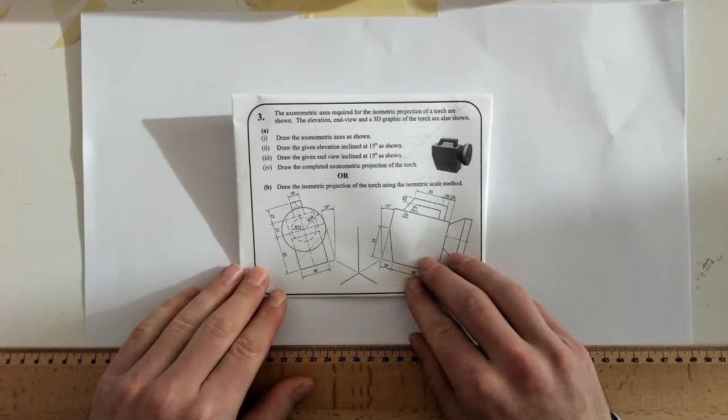Okay, boys and girls, so today we're going to go and do 2016 question 3. It's axonometric and we're going to try the part A here. So let's give the question a read. The axonometric axes required for the isometric projection of a torch are shown. The elevation, end view, and a 3D graphic of the torch are also shown.

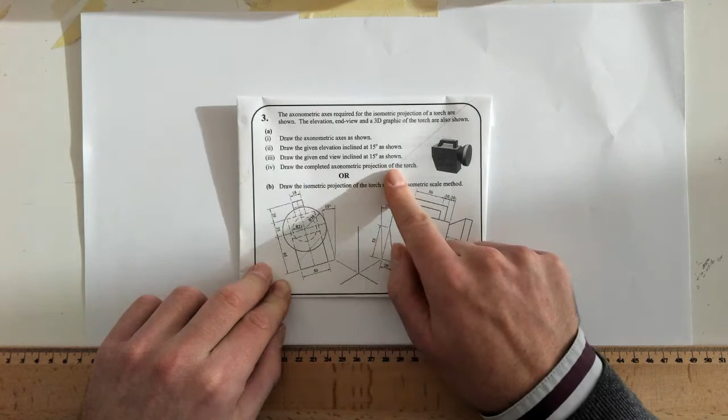Draw the axonometric axes as shown in part A1. Part A2, draw the given elevation inclined at 15 degrees as shown. Part 3, draw the given end view inclined at 15 degrees as shown. So this is the end view elevation, okay? And then draw a completed axonometric projection of the torch, okay? That's your 3D view there. So we've got to get these two started first, and then we'll go from there.

So first thing we're going to do is we're going to start off in the middle of the page, and we're going to start off with our drawing, okay? Now, so pick a point somewhere in the middle of the page. I'm going to pick this point here, okay? And we're going to draw our axonometric axes, okay?

Okay, at this point I just want to highlight the fact that I've made two slight mistakes. One is that I keep saying the plan, where in fact if you look up this corner, what we're going to be looking at is the actual end view, okay? I said the plan a number of times, but it's actually the end view, okay? So just to clarify that.

The other thing is the focus is a little bit off, and I will fix that later in the video. So I didn't notice for a few minutes, but just keep with it and I will fix that, okay? Thank you, and keep watching.

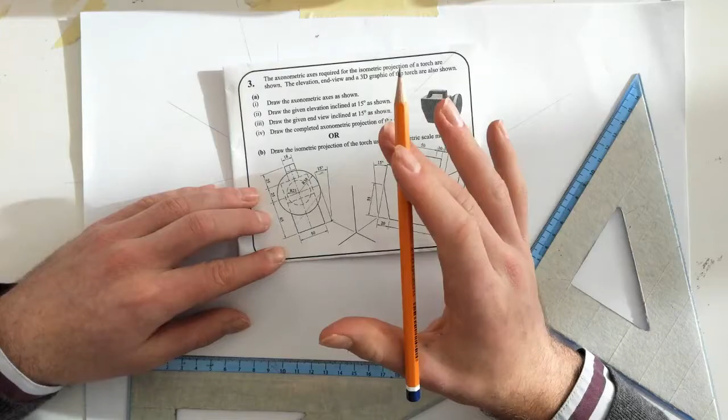And then if we look at the total height, we've got a height of 65 plus 25 is 90, 115, okay? So let's make sure we have that height first. Oh, looks like we're going to be very close to the edge here with this question. I'm using an A3 sheet, so that's why I'm pushing it so far up the corner. So we said it's a full width of 76. Okay, so I'm going to mark my 76 here.

Okay, and then let's take this angle via sliding set squares, and let's go here. So let's roll this up. Now, we said we had a total height of 115. Okay. Mark my 115 there. And again, just using sliding set squares. Just going to roll it up.

Okay. Now I know my last little corner there isn't quite on the page, but I will get to that. Now I'm just noticing my focus is slightly off. Now, should fix this there. So we've got that there. So we've got the main square of it.

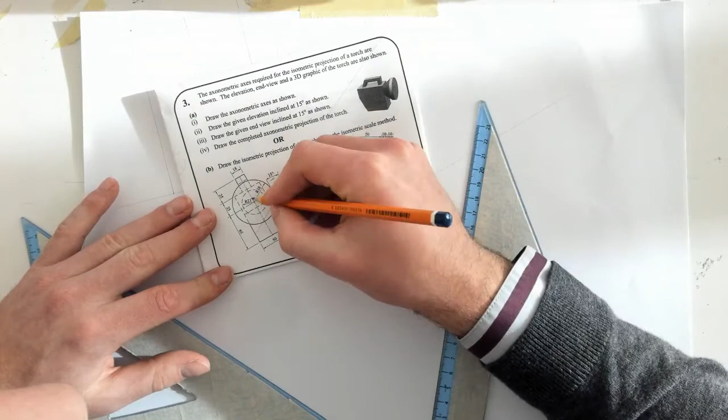So if we go along this center line up, we get to this point here, which is up 65. And that point there will be the center of our two circles. Okay, so if we look at the question here, we've got an R38, and an R21 is the small one, and then R38 is the larger circle. Okay.

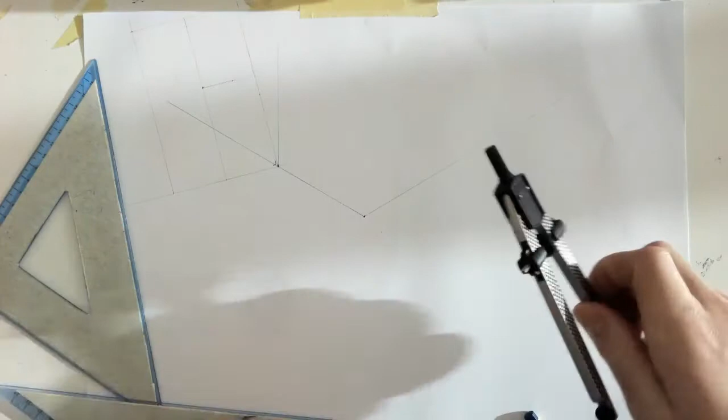So I'm just literally going to draw a line out from the center point. I suppose I better keep that parallel to keep everything perfect. You can see it already was parallel, but wasn't using the right method. And the second one is R21, like so. Now let's draw our two circles in. Now, this second circle is actually dotted, which I will get to dotting later. Okay, perfecto.

Now, if we look at the next part of our question, we can see here that the outer part here is solid, of 50. So let's draw that in. 25 and 25. Again, just using our sliding set squares. I'll actually extend that line on, but keep the lines nice and light, okay? Sometimes you see me drawing lines a bit heavier, and that's because I'm videoing, okay?

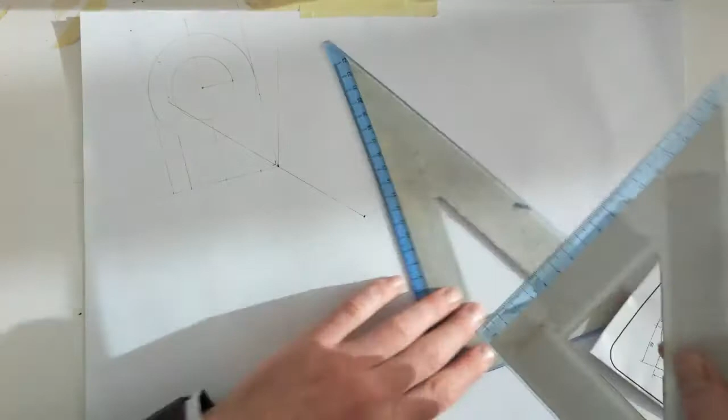So, along these lines here, we're going to come up to 65 and draw a dotted line across, come up to 90 and draw a dotted line across. So let's just mark 65 and 90. 65 and 90. Okay. Now I'm not going to worry about dotting these lines just yet, because I haven't gone over this in heavy yet, but I will do that later.

Now, the next part we're going to do here is we're going to look at putting this dotted line in here, okay? And it's not actually marked in the end view, but the size is 55 up, so that dotted line there is 55.

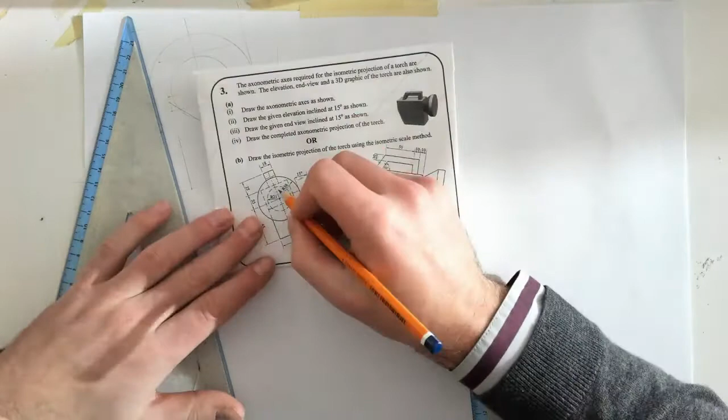So I'm just using sliding set squares again. Sliding set squares really is just the main kind of tool used here. So we're all but nearly finished. So what we've got to do now is just add in the top here. So it's kind of like the handle here. So it's got a width of 18. Okay, so width of 18. So it goes 9 either side, and I think I'm just about going to fit that on.

So mark 0, and then mark. We said 18, so leave a mark. Sorry, 18 is here. Leave a mark there. Now, again, just using sliding set squares. Draw a line down. And draw a line down. Okay, you can see I just about fit it on the page there, about 2 mil.

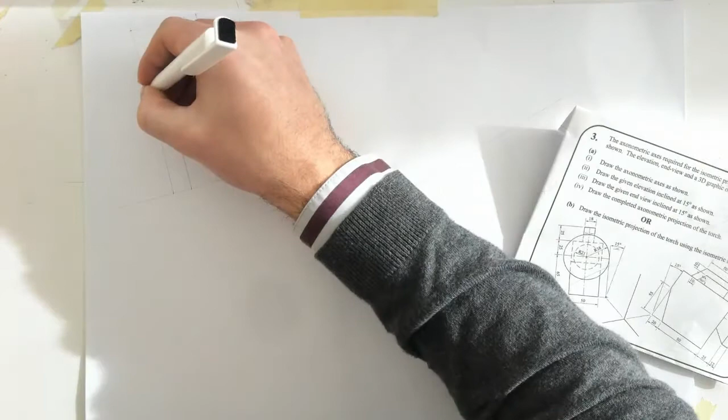So that is everything finished on the plan. I'm going to go over this now, and I'm actually just going to put it in with pen. Again, don't use pen. As students, don't use pen. I'm using it just so I can make the drawing that little bit clearer for you. Okay, so now we've got the plan, or sorry, the end view, beg your pardon. The end view absolutely finished out. Okay, so that's that complete. I've gone over heavy there just to make it that little bit easier for you guys to see, okay?

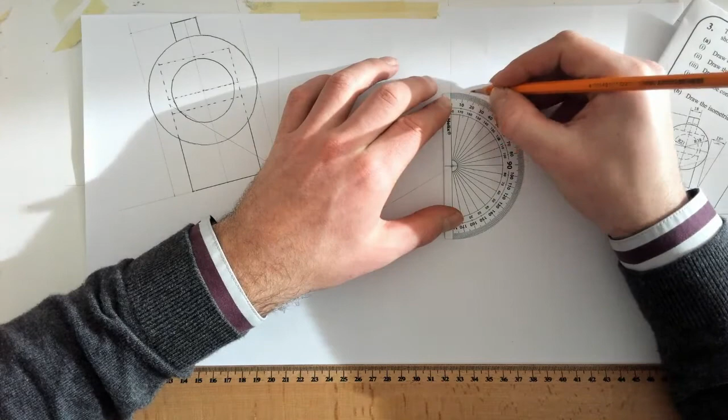Now, I'm going to do the exact same process. I'm going to draw the elevation here. So, let's get going on this. So mark out 70 mil again. Okay. Then I'm going to draw a straight line up. I always like to draw the straight line because it just makes it that bit easier to mark your 15 degrees, okay? So again, this question has asked that we draw the elevation at a 15 degree angle. Okay, so just use your protractor, mark 15 degrees off normal, and draw it in like that.

Then you can use slide and set squares, like so, just to come in and to draw our piece in here, like so. So right away the total length of it, if we add it up here, so we've got 20, 80, 25, 12, so that's 100, 125, 137.

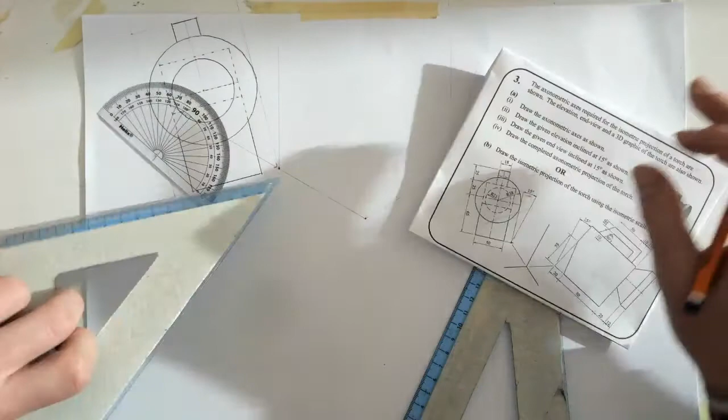137. It's always a good idea to draw the entire shape out in terms of a big rectangle, because if you've gone over the size or gone over the page limit, it'll just give you an idea, okay? Especially if you're like me now, drawing a question that should be drawn on A2, actually on A3. Okay, that's good. Now, let's add together the total height here. I suppose we've got the total height already. It's over here in the end view, and it is 115. So I'll come up 115.

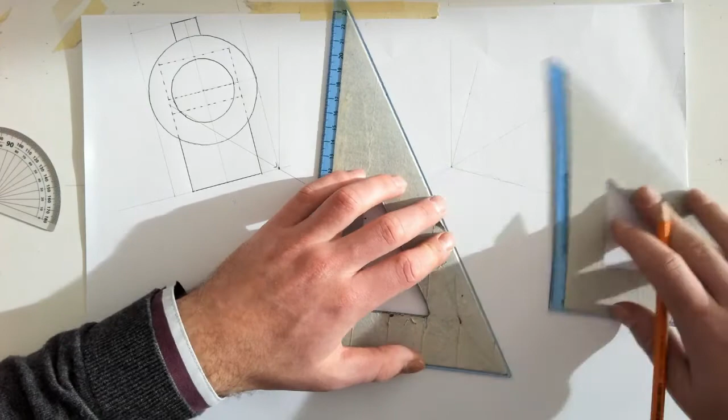Oh, looks like I haven't been lucky here, and I'm probably going to miss out. It's going to be slightly too big. I'll just catch it in here. 115 is just there. If you're drawing with a piece of paper that is the correct size, you should be fine. I am not, however. Go straight there. Draw across, like so. Oh, looks like I'm just about going to make it. So,

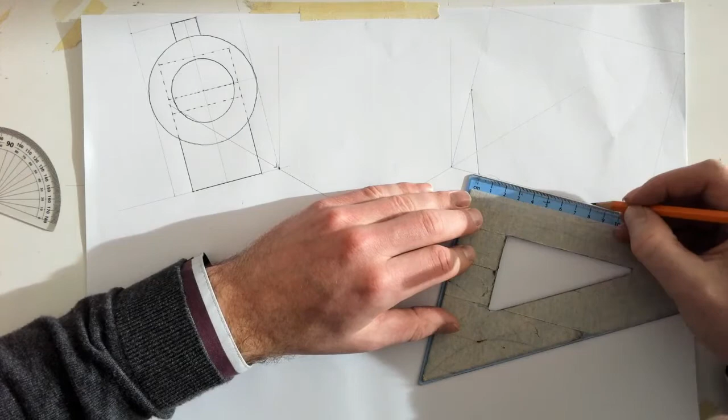first steps first, we're going to start off in this corner and start drawing from there. Okay. So, we're going to come in 20 mil from this corner, like so, and then up 55. Now, when we've done that, what we'll do next is we'll move on and we'll mark on 80 from here. So what we've done there is we've marked 80 on, and that 80 is giving us up to this point here.

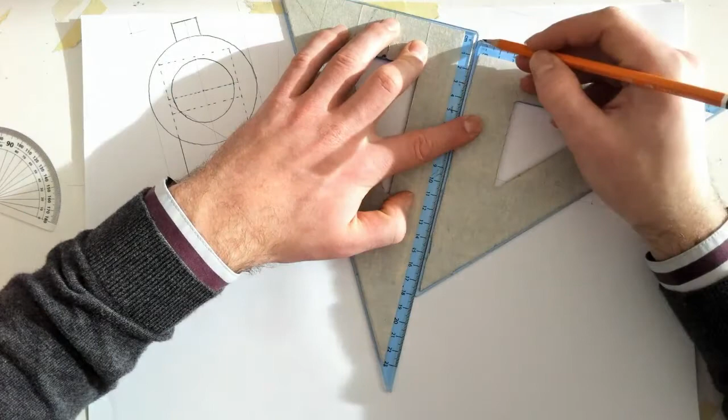So the next thing we're going to do is we're going to mark up a total height of 90. Okay, so 90 is going to bring us up to the back of this here, okay? So we're going to mark up 90. Okay. Perfect. Okay. So if we look at this now, the first thing I'm going to do is find this center point on this line here. So this is the center point here, and it's up 65. Okay, up 65 from there.

Now, that's perfect. So we're going to mark up 65. Draw a line straight out across. Okay. Now, these are the two circles that we're seeing here. So one is an R38. So we're going to mark this. That's the larger circle, which is here. Goes out right to the end. So we're going to mark 38 from this point here down, and then that's going to be drawn across for 12 mil. So that's going to create that lip there, and then we're going to draw up like so.

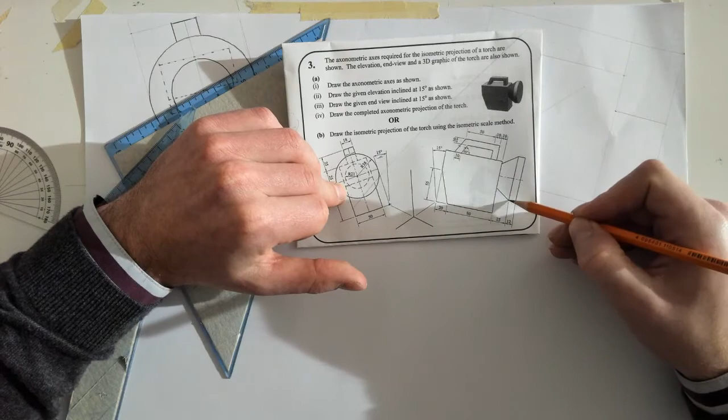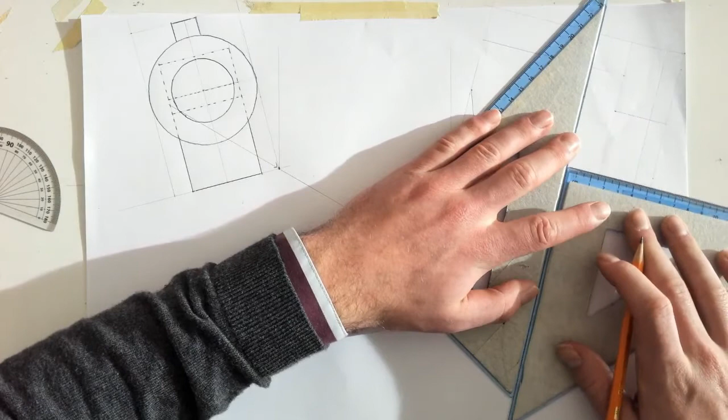So let's put 38 on our piece here. That's 38. Now if we mark 76 and 0, okay, let's mark 12 mil in while we're at it. 12 mil there. Okay. And what we're going to do is we're literally going to roll that in like so. Okay, draw that upwards. And just going to copy this angle here. Again, slide and set squares. Draw it across. Draw that across there.

Perfecto. And we know that the smaller circle here is an R21, so let's mark that in there. R21, 21 plus 21 is 42. Perfect. Connect these guys up. And we are nearly there. Okay. So that's the front of our piece. Oh, I actually just drew that to the wrong point. So that point goes to 21, which is just about there. It's not there, it's there. Sorry about that. So the next thing we're going to do is mark in for this piece here. So we're going to mark in 10 and 10 for the handle.

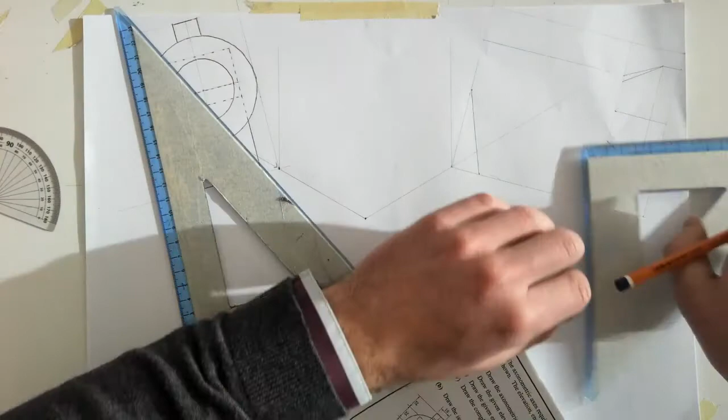And 10. Just draw a straight line upwards. Like so. That's going to mark off the start of our handle. So let's come back here. We've got the start of our handle done. So that's 10 and 10. And then it's got a total height here of 115. We've already got that 115 line there. And we're just going to mark down 10. So let's mark down 10.

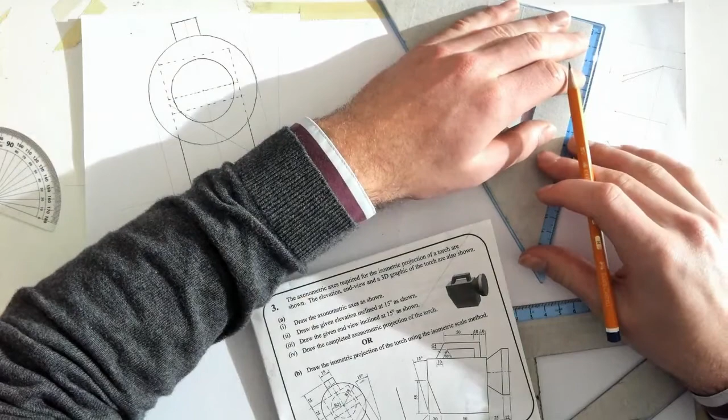And let's mark back 60. So mark back 60 from this line here. Okay. Perfect. Mark back 60. And that's the 60 point where it starts to go downwards, and it actually goes back at a 60-degree angle. So if we get our slide and set squares out again, roll it up, roll it down a little bit. That's the angle there, okay? And it is a total gap here of 10, so there's 10 mil in between the two of them.

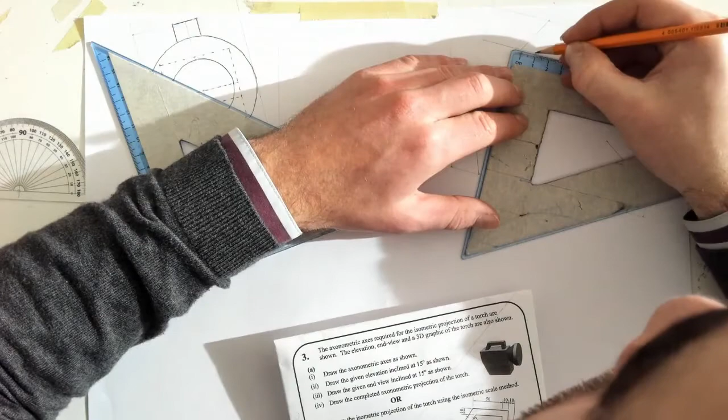Okay, copy that angle, bam, up like that. All we have to do now is bring this angle straight across. Like so. Okay, that's us. We're done with the elevation. Now, I'm going to go over this with pen, just to make that clear for the next part of the video.

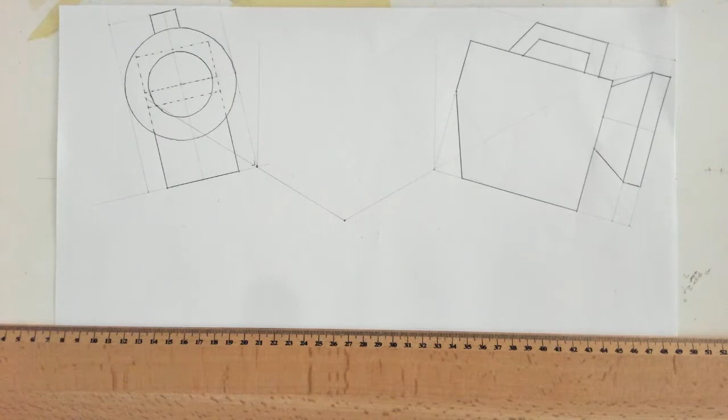Okay, so let's get going with the axonometric part of this question. First thing we're going to do is take our elevation here, and we're going to take the points down from the elevation at 30 degrees. So that's in line with your crow's foot here. I know that this bottom point here, there's going to be 2 points along that. I'm going to take the cutout for this piece here at a later stage. So I know those 2 points are along these 2 parts here. So let's bring our line down through here. Again, it's at 30 degrees.

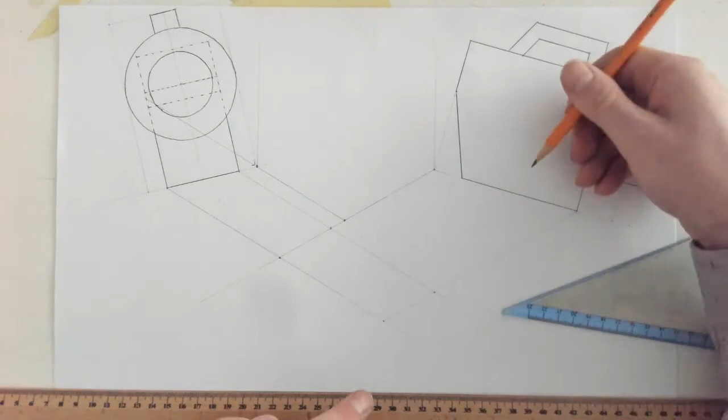Okay, like so, and like so. So straight away my 2 points here are located there and there. Now I brought those 2 points down, so I can bring this point here straight down at 30 degrees, like so. Perfect. So I've got the bottom here, this is almost like the bottom plate that lies here. So all the lines when you're working in the axonometric are going to be straight upwards. They're going to be vertical lines. So we can draw these lines in nice and vertical here.

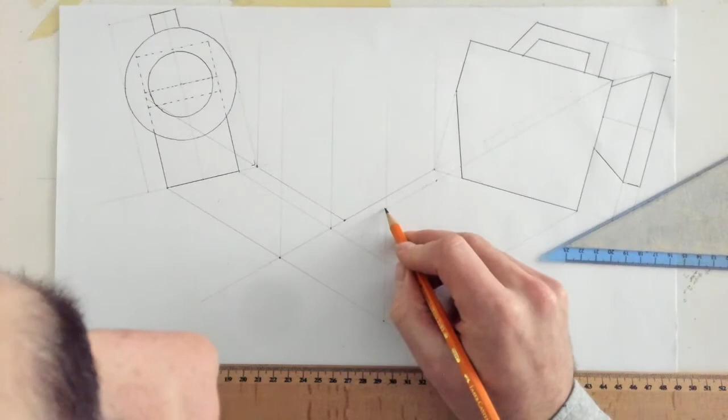Now, we want to locate the top of this torch, or the main body of the torch. So we've brought the line straight up here in the axonometric view, and let's bring points straight down at 30 degrees from the elevation. So this point here and here are going to be the top of the main body of this torch, and this point here, so here and here, are going to be the back. So that's the front of the main torch and the back. Okay, so we can connect up these lines.

Like so, and that makes up the main body. So I can't quite go over that hard yet because I don't know exactly what can be seen with this front, or the front kind of the bulb of the torch. But I can kind of go over with pencil. So I'm going to take the cutout now. So this cutout is like 55mm up here in the elevation.

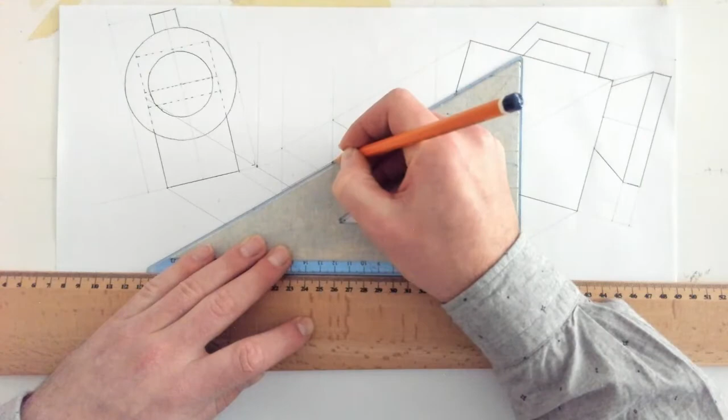So what I'm going to do is I'm simply going to bring it across, like so. So I know that cutout is a line at the back, so we'll go straight across like so. Okay, so that's my line at the back. Now that won't actually be seen, so that should actually be broken. So I'll put that in broken later. And that cutout is kind of the triangle which is connected to here. So let's bring this down at 30 degrees. Okay, bring that down at 30 degrees. We'll just connect up those 2 points. Okay.

And in our piece here, let's put this in broken lines. Okay. So that's our piece there. Now, the next thing I'm going to do is I'm going to wait a second until I bring up this piece here, the lamp, because that's where the circle is and kind of the main difficulty of the question is. Okay. So I'm going to finish off this piece here, which is like the handle.

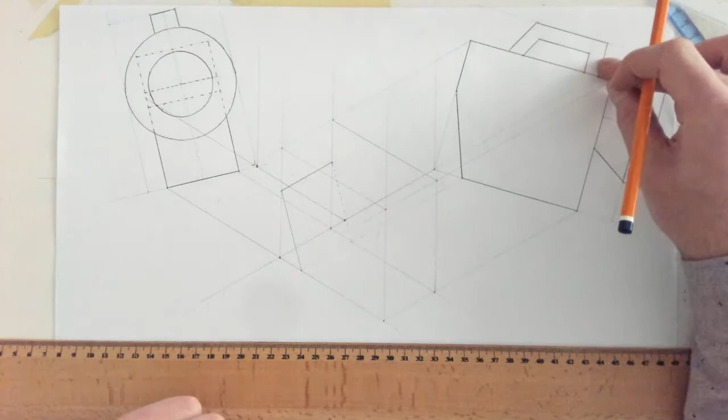Okay, so we know this goes on the top surface. Alright, so what we'll do is we'll start off at the bottom here. So we'll bring this line down like so. So we brought that line down from the elevation. Okay, so let's locate that here.

So Gabriel, Nikita, if you're on screen, you call down to the office, please. Gabriel, Nikita.

No. So I'm just going to finish off my end view here, just slightly. So what I'm going to do is I'm going to add in this broken line here. Okay, so it can be seen just there. Okay. So I'm going to take my pen, finish that off.

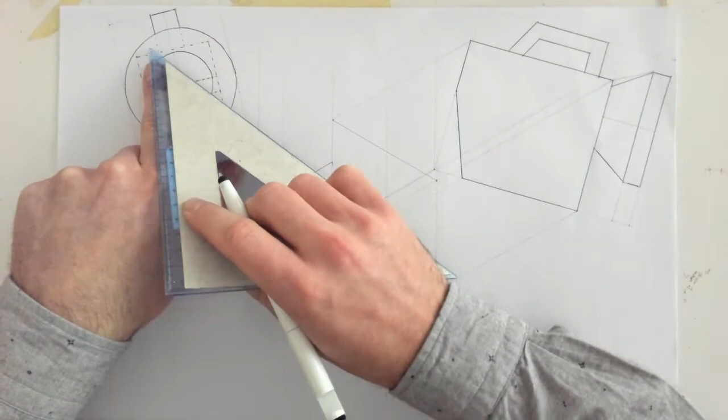Okay. So if we look at here in the end view, right, that is directly located, and we can bring it down 30 degrees, and that will find us kind of where this lies in the axonometric view. Okay. So let's bring it down here from the end view. Okay. And we know it's along this line, so it starts along this line here.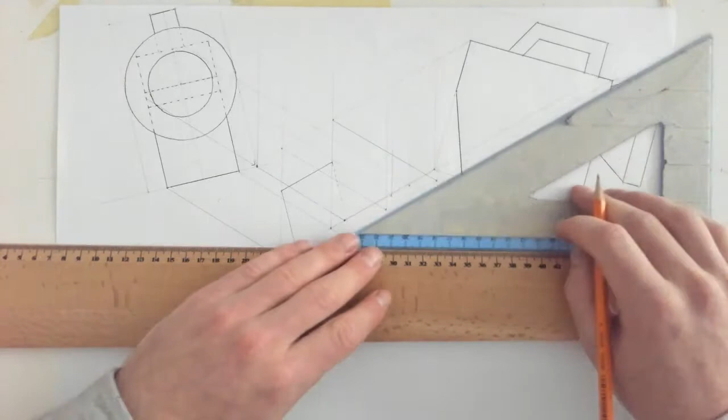So let's have a look here. At this point here. So that's going to be 1 point. And that's going to go straight up vertical, because we know all lines that are vertical here are also vertical in the axonometric. Straight up like that. Okay. And let's bring the line down. Like so. Okay. So that's the front here of our handle. Okay. So we've gone up and brought it down from here.

Okay. Now, let's continue that line back at 30 degrees. Okay? Like so. So we've taken these 2 points, this is the top here. We've taken that back and we've brought that back at 30 degrees. And we're going to do the same. We're going to take down the back of our handle here. Okay. And we're just going to bring that down until it hits these lines here. So this is in line with this.

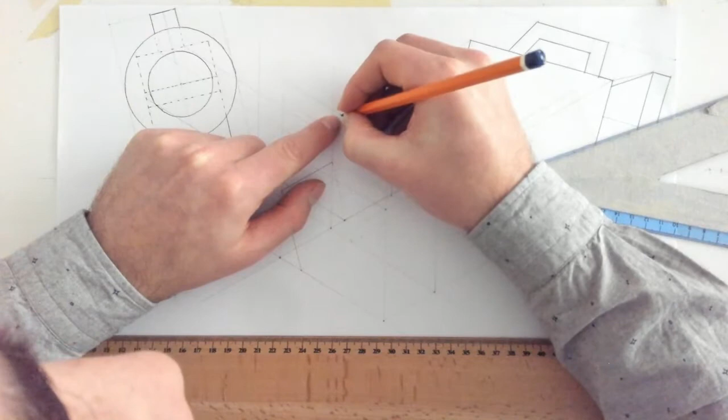This. Okay. So we've worked out the 2 points here. So we brought them down from this. Oh, look, I've labelled it incorrectly. So it's actually coming along this line, which means it's here and here.

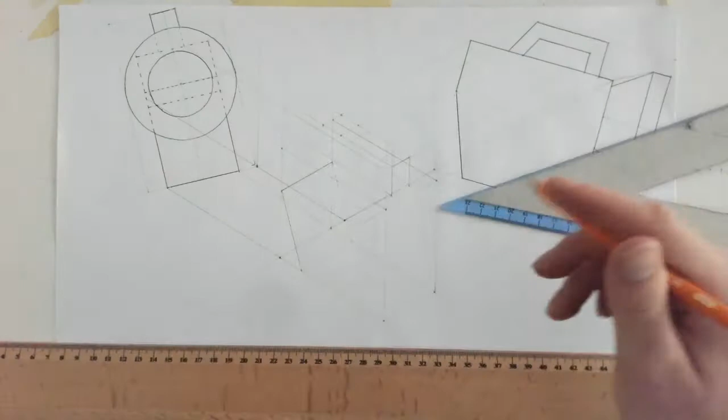Okay. Now these come back at a 30-degree angle, so we have to locate these 2 points. So straight away, I know they're going to be along the bottom, so they're going to be in line with these 2 points here. So we're going to bring down these back at 30 degrees. Okay. And we come up here to our elevation. Down. Okay. So I brought these 2 lines. This is kind of like the back here. 1, 2. Okay. So that's going to be a solid line. Okay.

Okay. And what we just have to do now is just to find the other angle. Now, what we'll do is we'll find this point here. So we know this is along that bottom line there. Okay. And we'll just bring it back 30 degrees. Okay. And let's bring it straight up, because I know all the lines that are vertical are just going to be vertical in the axonometric.

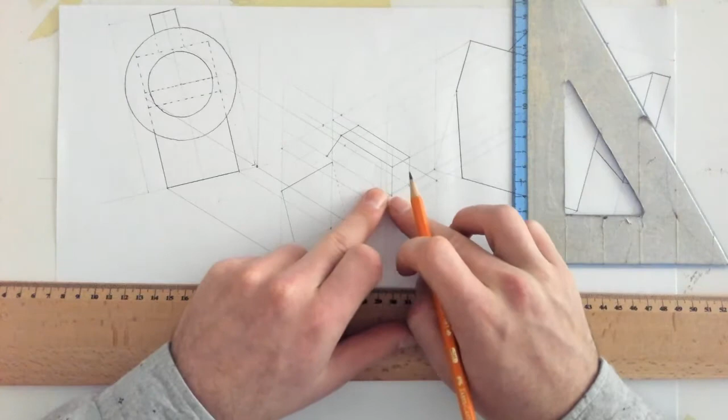Okay. Now what we've got to do is we've got to work out this point here. So that's actually going to be viewed also in our end view. So we know it's a 10 mil gap there. Okay. So let's mark that into our end view. So let's mark 10 mil down along here. Okay. That's kind of the handle. And let's mark a point across there. Okay, so we mark that across.

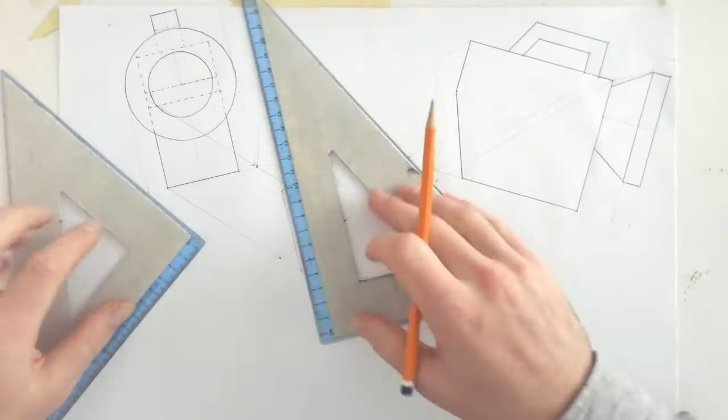And we're just going to bring that straight back. Okay. Where that hits this point here, that's going to be like the bottom part of our handle here. Okay. So got that there, and I know that's going to go back in a line until it comes to this point. Okay. So let's bring this point down.

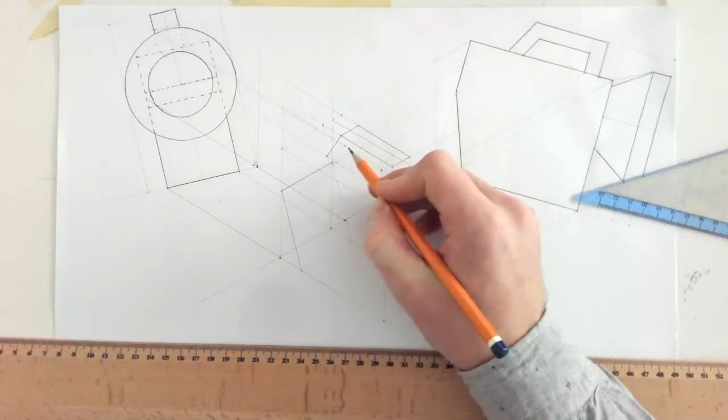Okay. So I've brought that point down. And so I've brought this point down here, and I am going to now locate the point where it is on the ground here. So it goes from here to here. So we located here, and then we're going to find this point here. So I've already brought that down, straight along this line. There you go. So we're going to connect those 2 up.

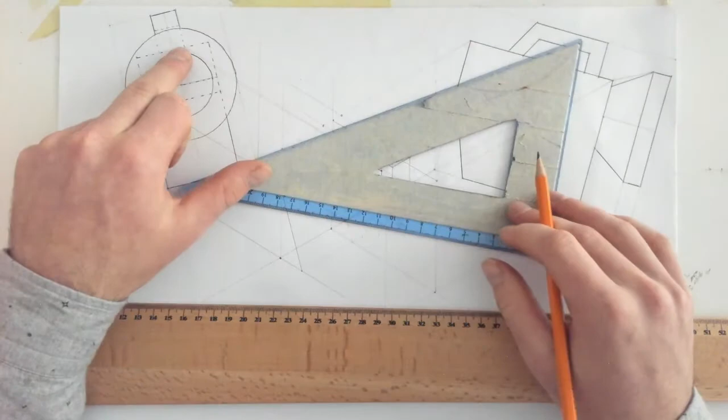Now, so I want to locate the far point, because there's going to be a little 3D line going in here. Okay, so that point there is just there in the end view. We've already brought that down. So it's along this line here, and it's going to be just there. So we're going to draw that in.

Like so. Okay. So what I'm going to do at this point is I'm going to go over the lines heavy in my axonometric. And that's just to make it a little bit easier for you to see exactly where I'm drawing.

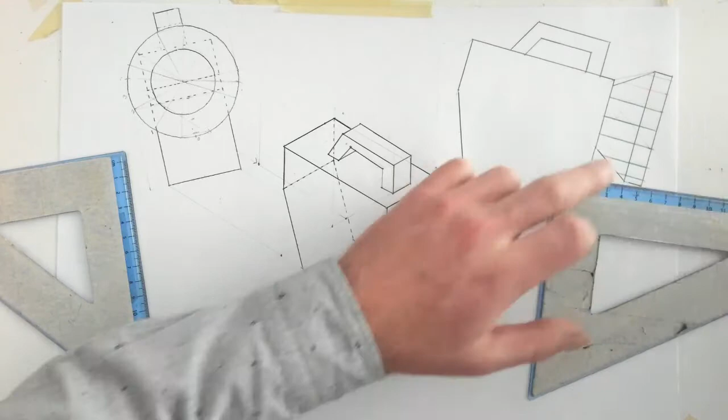So as a suggestion, you can make this any measure you want, but I would suggest making them 10mm segments, similar to what I have. Now as long as they're all equal, that's the important thing, that they're roughly equal. So if you have your 10mm segments, this is the center point here. Okay, so that's the center one there, and you go out 10mm every time.

And what that does basically is you almost slice up the 3D shape so that you can draw it in 2D. Okay? So, I'm going to do the same thing here. I'm just going to put my compass here, and I'm going to measure it out along the center point. Okay, so I've got a center point line here in my end view, and I'm going to just measure it out.

Okay, so you're taking the slices from your elevation and we're marking it in our end view. Okay, so the next point, and again about a 10mm gap in between those slices is absolutely perfect. Okay, so just transferring it over like so. Final one there.

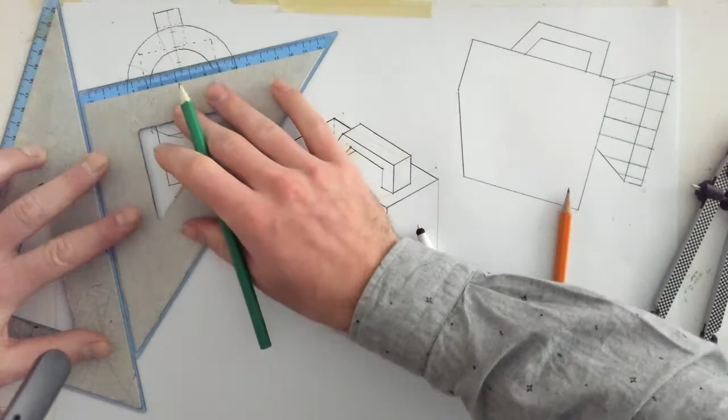Now, when you've done that, what I want you to do is just take the slices like so. Okay, so I've taken the slices and I've just transferred them over from this point here. And what I'm going to do is I'm going to actually label these slices now. So I'm going to put this one as 0, this one as 1, this one here is going to be 2. Ignore that one there.

This is going to be 3, this is going to be 4, 5, 6, 7, 8, 9, 10, 11, 12, 13, and that's going to be 14. Okay? So, along this center point line here, I have slices at 4 and 11. Along this line down here, I have slices at 3 and 12. On this line here, I have slices at 2 and 13. Along this line here, I have slices at 1 and 14. And this point here is 0. Okay.

So let's move up one. So we're going to go 5 and 10, 6 and 9. This one here, I'm going to have slices at 7 and 8, and that's just going to be the top there. Okay, call that point 0. Just label that in there, point 0. Okay, so that's the initial setup and labeling of our piece. And now what we're going to do is transfer these points down and into the axonometric view. Okay.

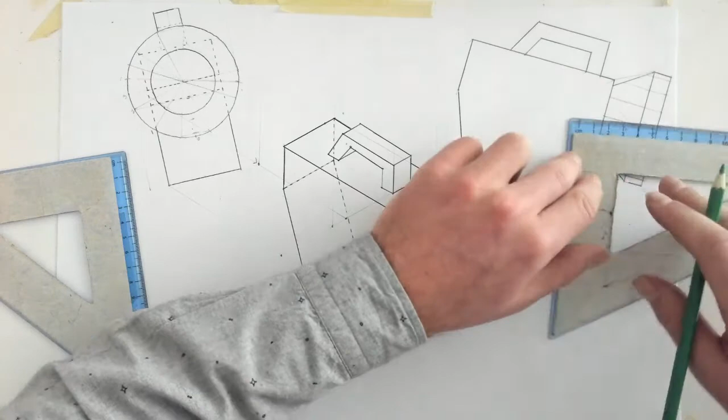So a suggestion: you can make this any measure you want, but I would suggest making them 10 mil segments, similar to what I have. As long as they're all equal, that's the important thing, that they're roughly equal. So if you have your 10 mil segments, this is the center point here. That's the center one there, and you go out 10 mil every time.

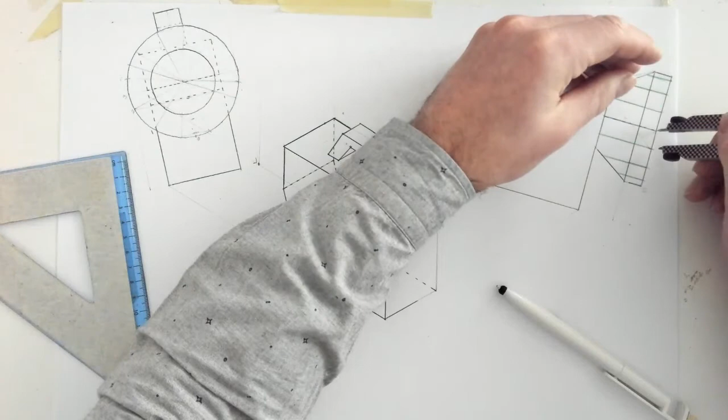And what that does basically is you almost slice up the 3D shape so that you can draw it in 2D. Okay? So, I'm going to do the same thing here. I'm just going to put my compass here, and I'm going to measure it out along the center point. So I've got a center point line here in my end view, and I'm going to just measure it out.

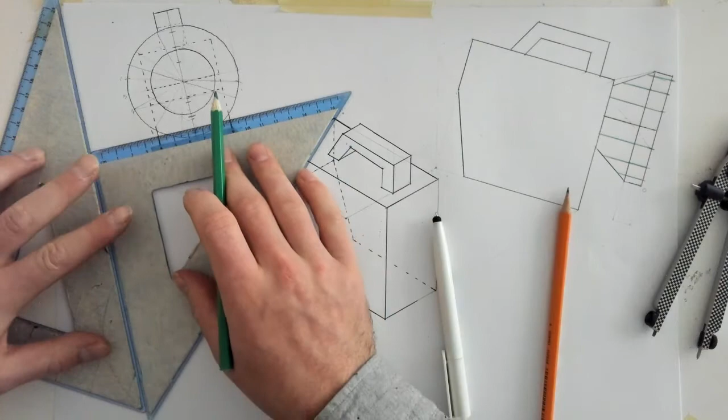Okay, so you're taking the slices from your elevation and we're marking it in our end view. Okay, so the next point, and again about a 10 mil gap in between those slices is absolutely perfect. So just transferring it over like so. Final one there. Now, when you've done that, what I want you to do is just take the slices like so.

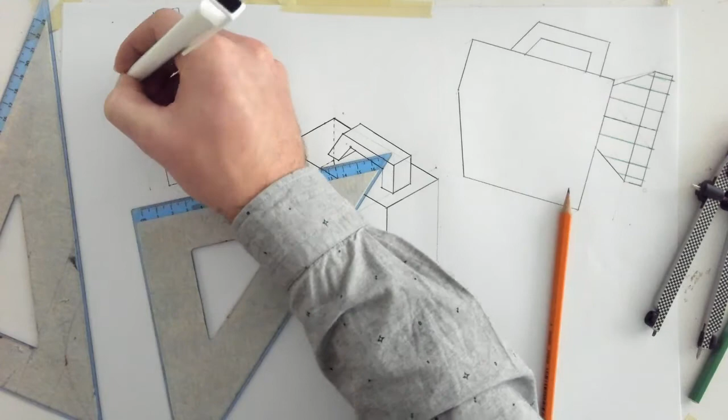Okay. So I've taken the slices and I've just transferred them over from this point here. So what I'm going to do is actually label these slices now. I'm going to put this one as 0. This one is 1. This one here is going to be 2. Ignore that one there. This is going to be 3. This is going to be 4, 5, 6, 7, 8, 9, 10, 11, 12, 13, and that's going to be 14.

Okay? So, along this center point line here, I can tell you that I have slices at 4 and 11. Along this line down here, I have slices at 3 and 12. On this line here, I have slices at 2 and 13. Along this line here, I have slices at 1 and 14. And this point here is 0. Okay.

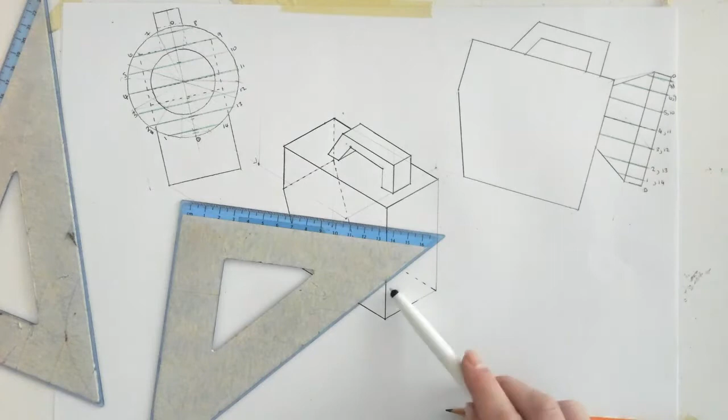So let's move up one. We're going to go 5 and 10, 6 and 9. This one here, I'm going to have slices at 7 and 8, and that's just going to be the top there. Call that point 0. Just label that in there, point 0. Okay, so that's the initial setup and labeling of our piece. And now we're going to transfer these points down and into the axonometric view.

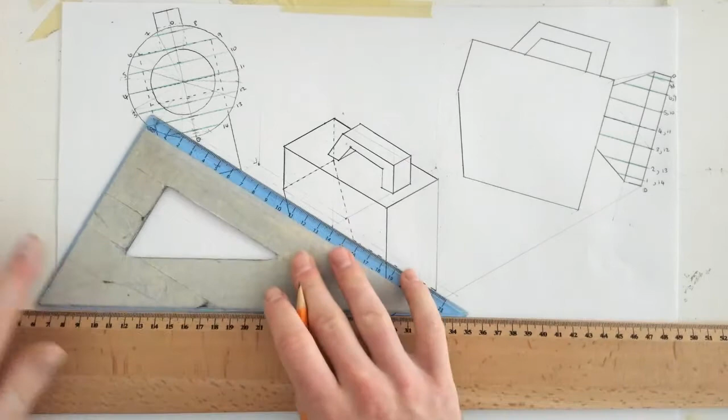Now, seeing as we found all the points here and we've broken up here, let's start drawing. So let's take down point 0. 0 is first. We're going to take it down from the elevation, and then draw it straight down, like so, into the plan. So it's at 30 degrees down from here and 30 degrees down from here. So that's your first point. We'll label that as point 0.

Now, the next points we're going to bring down are 1 and 14. So bring it down like so. Let's bring point 1 and 14 down, like so at 30 degrees. And that's going to be your point 1. And this is going to be your point 14. No, not quite long enough. There you go. And that's going to be point 14. So basically we're just building the circle up as we go.

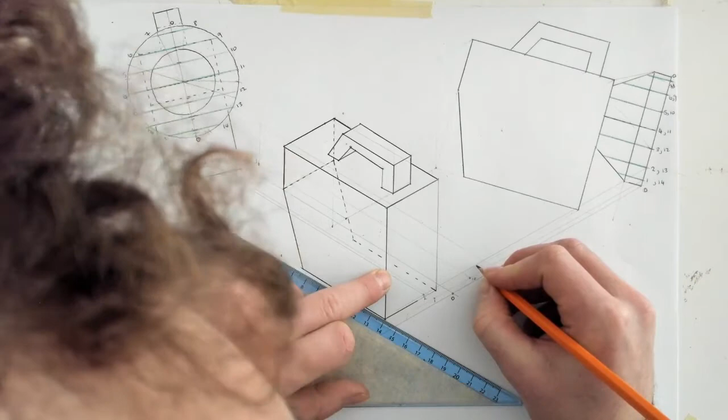So the next one, I'll bring it down from the elevation. Right, 2 and 13. And 13 is going to be along this line, so 13 is coming down from here. Okay, that's 13 and that's 2.

So let's bring this point here down, like so. 3 and 12. So we know 12 is on this line. So that's going to be point 12. And then 3. Okay, so 3 and 12.

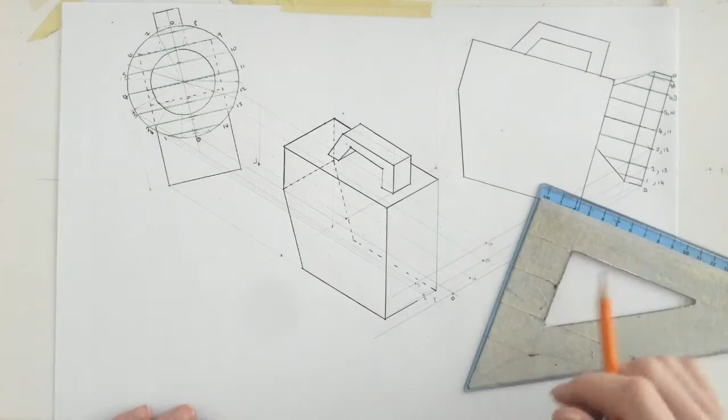So the next point is actually that center line. So we're going 4 and 11. So it's going to be along that line there. So 4 and 11 is on that line. So bring it straight down.

Point 11. We haven't brought 11 down yet, so let's bring that down. That is there. It's on this line, so that's it there. 11. Okay, so that's 4 and 11. Alright, so we're starting to see it, starting to come out. And then we're going to bring it down at 5 and 10.

Okay, so we brought those two lines down. Bring them down here from that. Okay, so we brought that down here. So this is going to be 10 along this line here. 10. And then 5 is on this line here until it's down. And that's going to be 5. Okay.

So let's bring 6 down next. 6 and 9. 6 and 9 is coming along here. Okay. And 9. Nearly there now. So this one here is going to be 9. 9, and that's fine. 6 somewhere along this line here. Wow. 6.

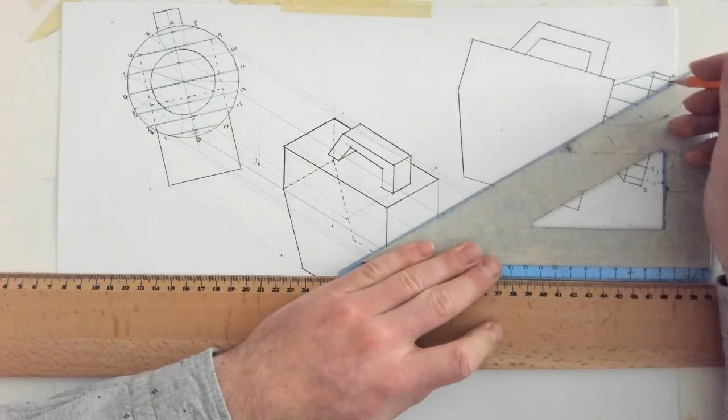And 7 and 8. Okay, so 7 and 8 are on those two lines. Bring 7 and 8 down from here. No, sorry. It's on this point here. So 7 and 8 are on this line here. It's going on this. And that's 7 there. And 8 is coming along this line here. Just there in the middle. So that point there. Okay, so that's 8. Okay. 7, 8.

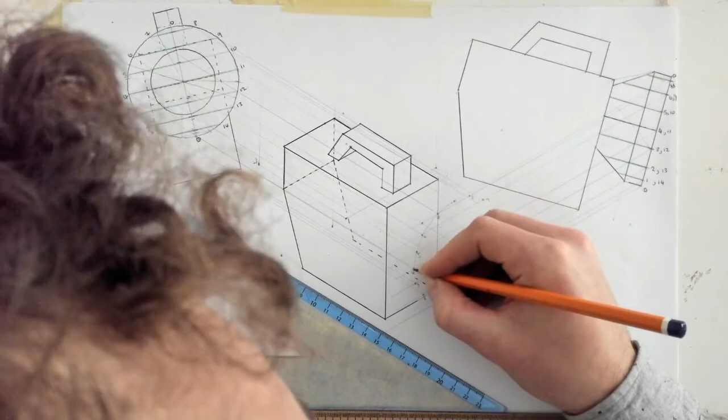And the last point is point 0. Let's bring it over. Okay. So point 0 comes down and it hits at this point. Okay. Now, what I'm going to do is draw it in a nice freehand curve. Okay. So I found all these points here. So I'm going to go over that in a heavy line, just to make it a little bit more pronounced.

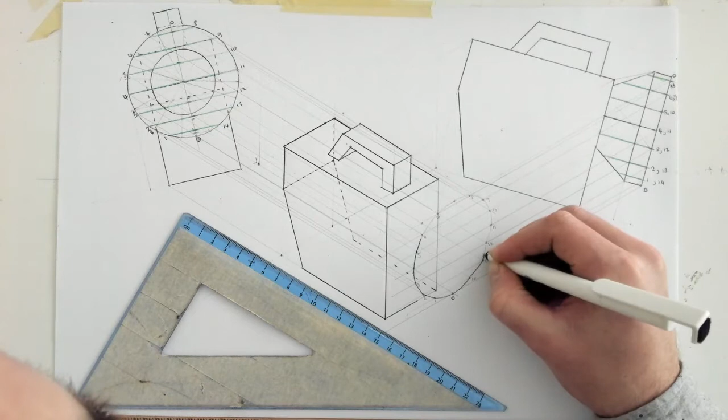So what we can do now is put in the second circle here. Okay, so this is actually a little trick that makes it a little bit easier. We know that we've already brought the lines down here, so we just have to locate them here. So we've got a point 0, for instance, up here. We have a line going back at 30 degrees already because we brought it down from the end view. So we can literally just bring this line down here, where that collides here. That's going to be our next point 0.

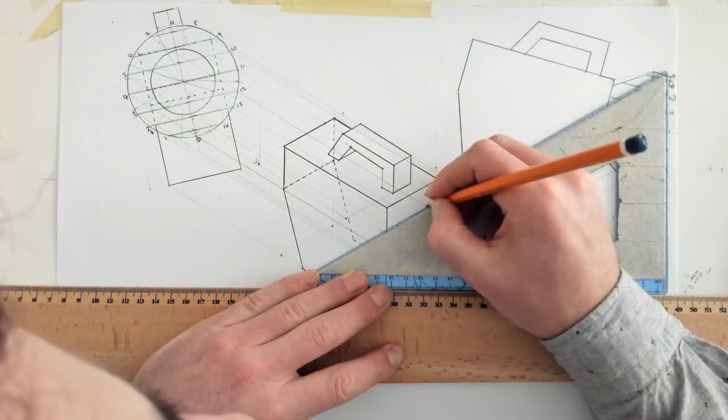Okay, so we've taken the line from here. Instead of here, we've taken it from here. And we're going to then bring this around. So next point down. Point number 7 and 8 is along this line here. And that just hits there as the next point. Okay. And the next one is point, sorry, I actually never marked in the 8 there, so that's along that line. That's it there.

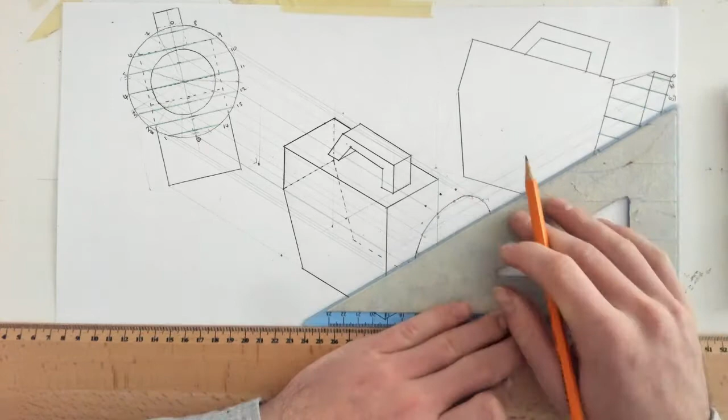Okay. Now it's important that you understand that part of this won't be viewed, so I'm just going to go over it lightly first and then figure out what I can see and what I can't see, and then draw from there, okay? So 5 and 10. Let's bring this over here. So wherever that hits 5, so 5 is here. Okay. 5 and 10. So 10 is here. Where is this line? So this line. It's there.

Just that point there. Okay, I haven't drawn it for 9 yet, so I have to bring 9 back. So the line there goes through 9. Okay, so we'll draw that back. So where that hits 9, which is just there. Okay, so that goes back through 9. There. Yep, that's the 9 there. Okay, so that's going to be the last point that we can see. And then we've got 9, 10, 11.

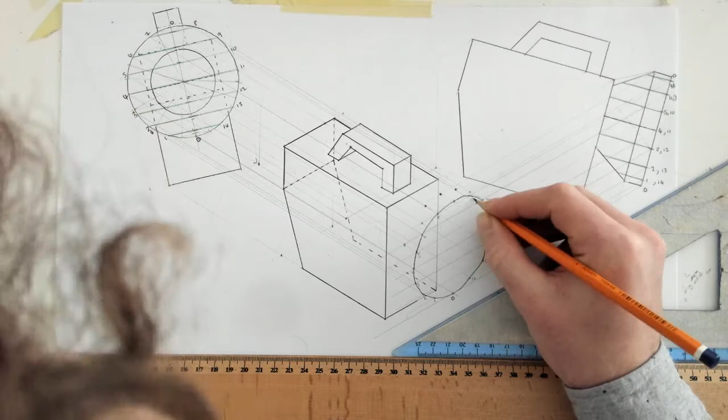Bring this line straight back. We already have a line going straight back through it. And where that hits 11, it's the next point there. Okay, so now we're not actually seeing that, so it's going to be in a broken line. Okay, and then next we're looking at the point 4. So it's this point here, there's already a line going through it. So it's 4 and 11. We already have the point 11, so 4 is on here.

It's there. Okay. 3 and 12. This going back here. So 3 and 12. That point there, with the line going through it already. So 3 is at that point there. Okay, we still see that. And 12 is right here. 3 and 12. So this is entirely just locating points. I notice that one is missing from 6. So this goes through this point here. It's that right there.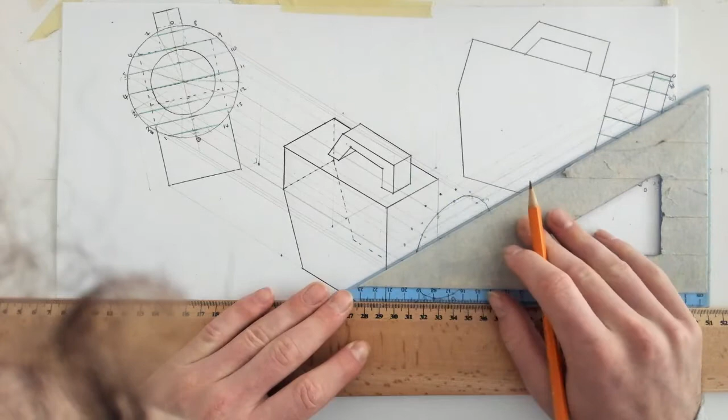Make that up. Okay. And sorry, actually, slightly further out. That one there. Okay, so we'll just dot that in there so you can see it. And then 3 and 12, 2 and 13. Okay, so it's going to be on that point. It's going to be there, and 13. Okay, and 2 and 13, 1 and 14, we're nearly there.

1 and 14, we can go straight down through here. Okay, so it's going to be along that line there, and that's going to be 1 and 14. So along that line, yeah. So that's 1, and then 14 is here. Okay, and then the last point is 0. So on that line there, that's back to 0. Boom. So this line here, we can draw this in straight.

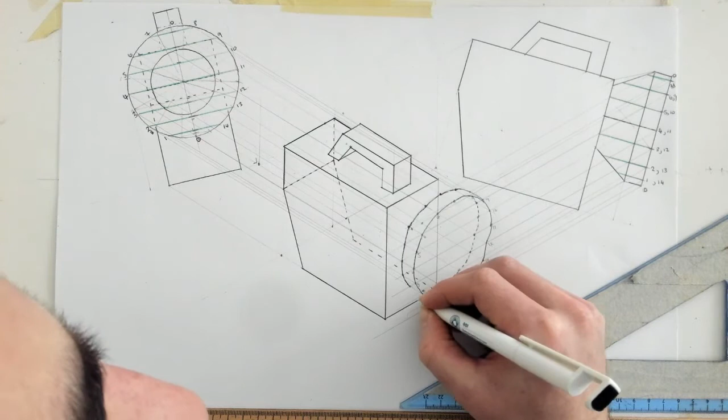So obviously the inside here we can't see in direct vision, so it's drawn with a broken line. Okay. So that's what the lens here looks like. Okay.

Okay, so there's one last bit to finish in this drawing, and it's actually this inner circle. It slopes inwards to this circle, so we've got to locate these points. Now we've already got our slices broken up here in our original view, so we can use those again. Let's relabel them as such.

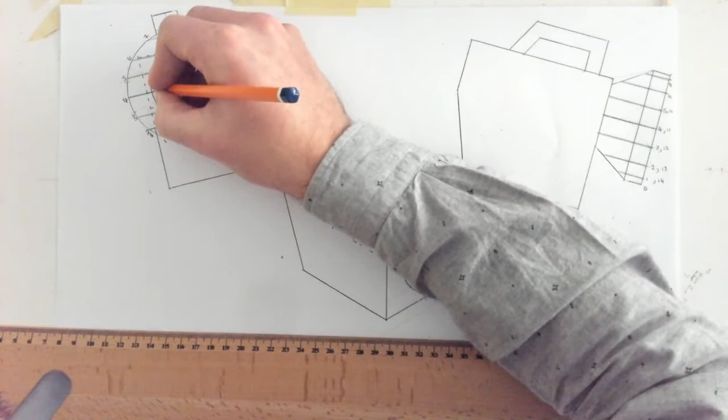For this we're going to just take the slices that actually slice through our circle. So this is going to be 0, 1, 2, 3, 4, that point there, 5, 6, 7. Okay, so we've got a total of 8 points.

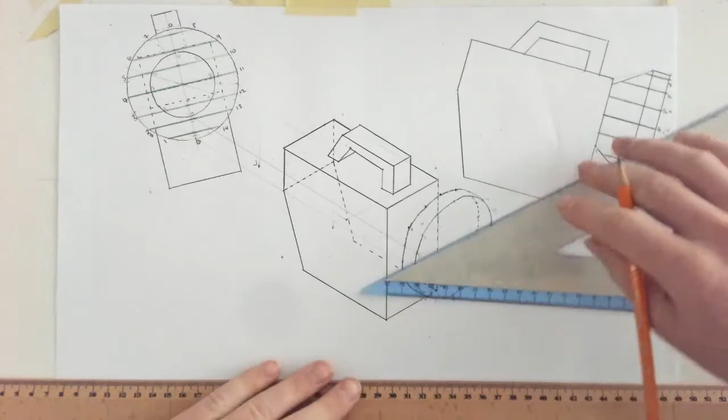Now we're going to start off by figuring out where that bottom point is. We're going to bring it down at 30 degrees, like so. We know that it comes down at 30 degrees in the view, and we know that it's at this point here. That's point 0. It's on that line, and where it hits this, that's our point 0. That's easy. So let's put our points up here.

Here is 1 and 7, 2 and 6, 3 and 5, and the top is 4, at that point there. So we already got point 0 marked there. That's point 1 and 7 along this line here, not 5 and 7. 1 and 7 come down like so, where they hit this line which is coming along here.

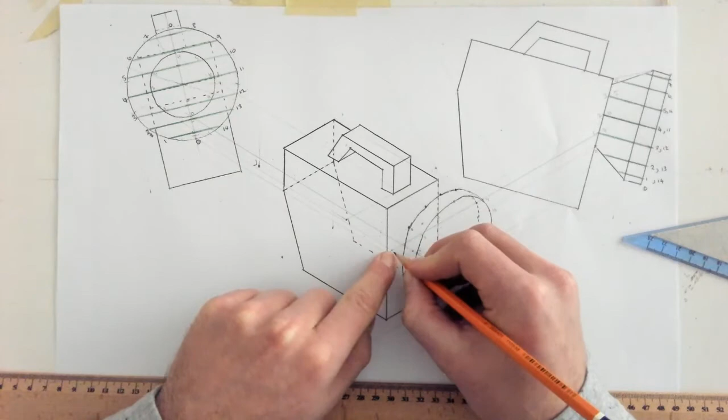Okay, so let's extend this line a little bit. So 1 and 7 comes to this point. We have 7 along this line, so let's bring 7 down. So that's 1, and this is 7 here. 1 and 7. So we know that's going to go around and down to that.

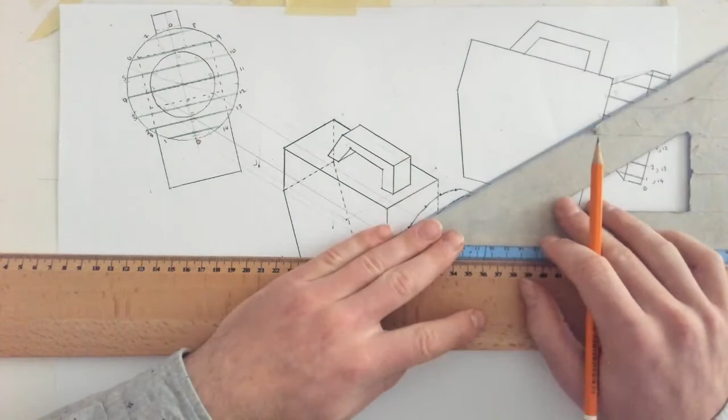Now the next one we're going to find is 2 and 6. This first one, 2 comes down along this line and goes out to hit this point. So that's point 2. Let's have a look for point 6. That's a little bit off, so we'll take down our own point 6. It's going to hit along that line, so point 6 is there.

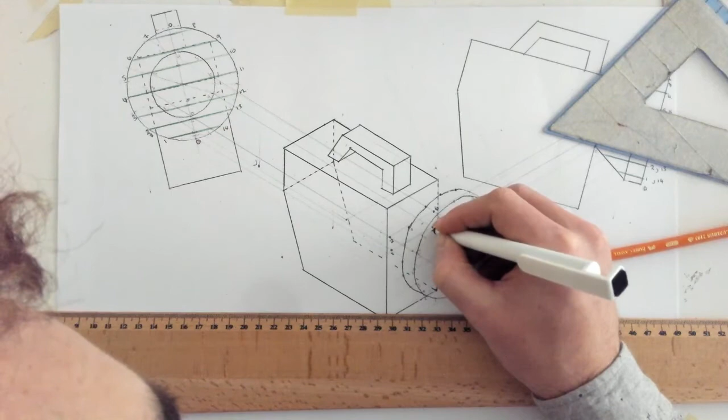Okay, I'm going to go over this in pen so it's a little easier to view. So that's point 1, 2, 6, 7. Point 0. 1, 2, 3, 4, 5, 6, 7. Okay, perfect. So let's get 3 and 5. We're nearly there now, there's not that much to go.

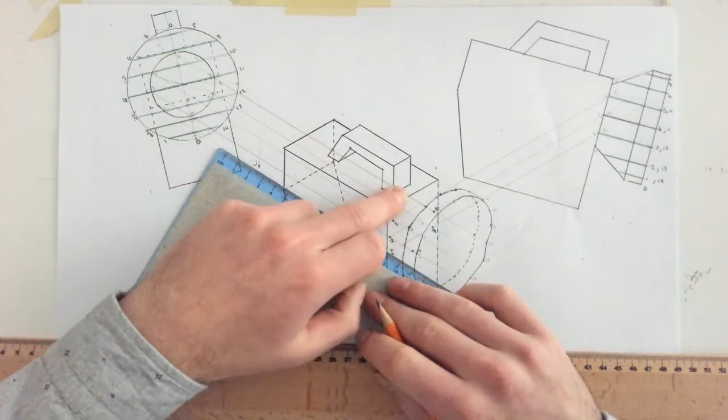So bring the line straight down. Okay, so 3, let's bring it down. Yep, that point there, 3. Sorry, 3 I've got, and 5 is what I'm looking for. So bring 5 down there. I know it's along this line here. That's it there.

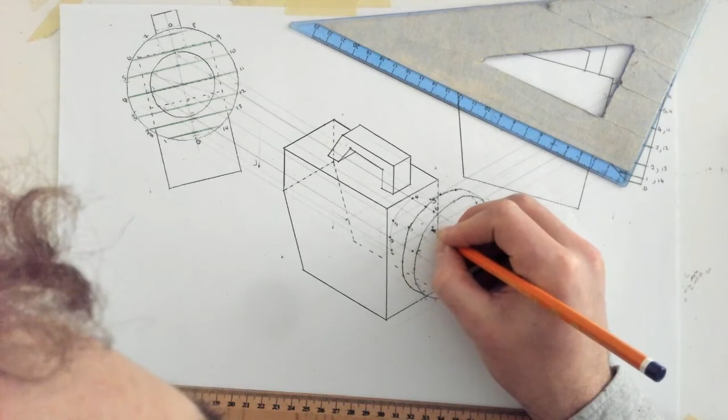Now, my last point, point 4, straight down from here, and bring the height to here. Okay, that's point 4. So let's start drawing this in. After point 5 to 6, it looks like it goes to a hidden dotted line. 0 is here. Then 1. Cool. So let's go over that in pen and have a look at it.

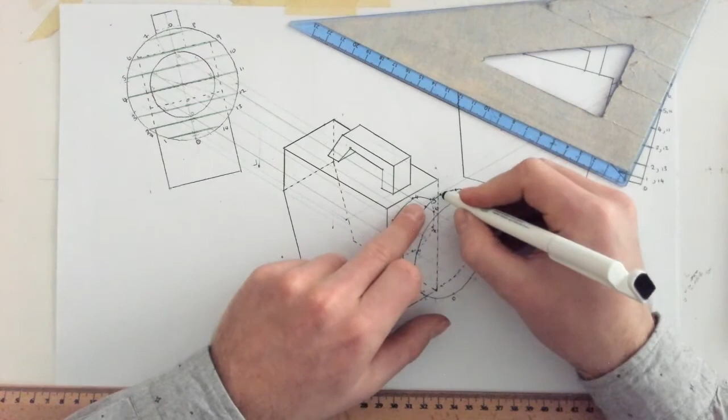Now obviously, from point 1 out here, there's going to be kind of an overlap there, so we can draw that in. That almost makes it appear 3D. And then from point 4 to the back here, just like this. So that's our torch complete.

Obviously there's a huge amount of lines there, so it's a tough drawing in terms of how to break up the circles. But it's great practice, because you won't really find three separate circles you have to break down in any other exam question.